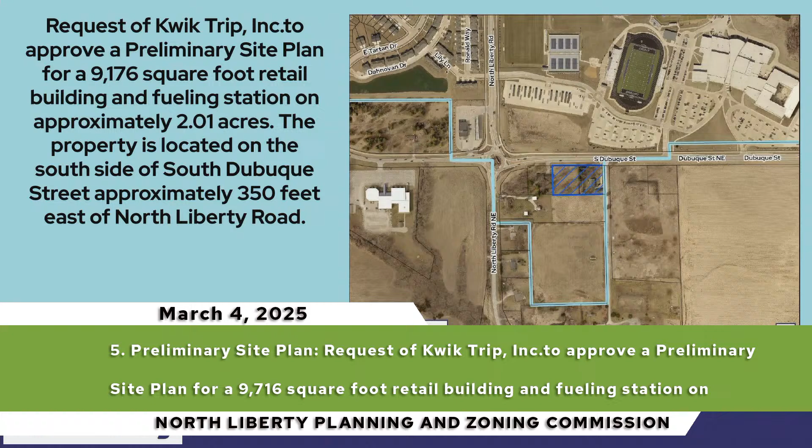Okay, so this is a request of Kwik Trip Inc. to approve a preliminary site plan for just over a 9,000 square foot retail building and fueling station, just over 2 acres. It's on South Dubuque Street, just east of North Liberty Road, across from the high school. You've been seeing lots of activity over in that area related to the construction of the subdivision improvements. You can see the area in blue up there. And the light blue line is actually the corporate limits of North Liberty. So it's pretty close to the southern limit of the corporate boundary.

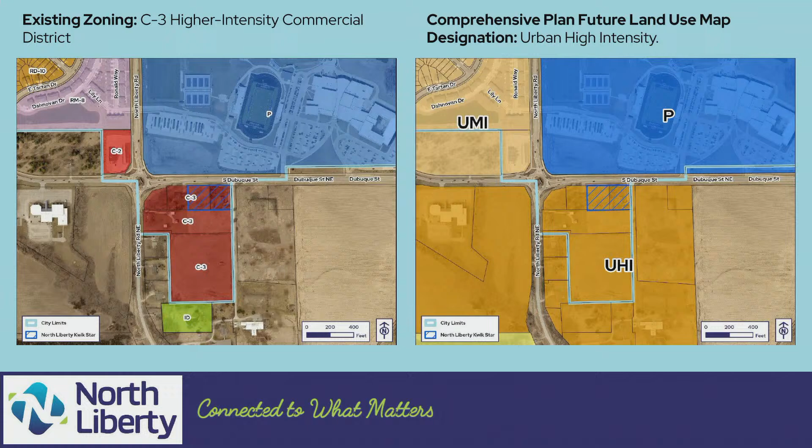Property is zoned C3, which is higher intensity commercial. Future land use map designation is urban high intensity, so the zoning is consistent with the future land use map designation. Pretty straightforward request. We did work closely with Kwik Trip folks. We had some concerns with the original layout, so they've been great to work through. There's a private road on the left, which would be the west side, so they've got access over in that location. The street to the east or on the right-hand side is a public street that will be constructed in conjunction with the subdivision. But just had some concerns with them, so they responded to those and revised their site plan accordingly. So we appreciate them working with us.

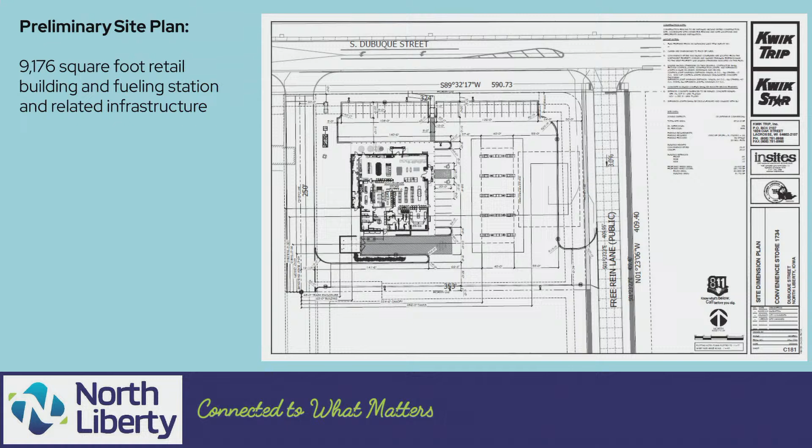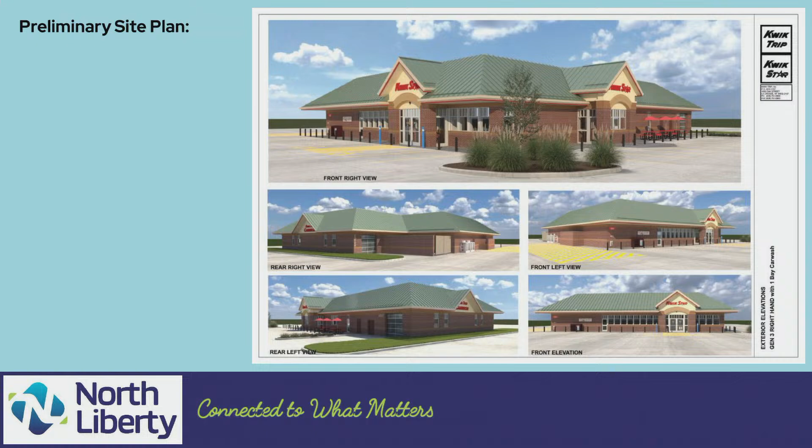Do we have an applicant presentation? Hi, my name is Casey Bonger. I'm a real estate manager for Kwik Trip and Kwik Star. Thank you for reviewing our site plan tonight, and just want to say thank you to Ryan. Great to work with. As he had mentioned, we worked through a few iterations of the site plan and I think came to one that works well for both parties. So he went over kind of everything related to that site.

It is our Generation 3 building, which is similar to the existing location in North Liberty. And we did have to take off the car wash here just due to grades on the southwest corner of the property. So otherwise, I don't think I have anything further unless you have any questions. Okay, do we have any public comment? Great. Move on to any questions or comments.

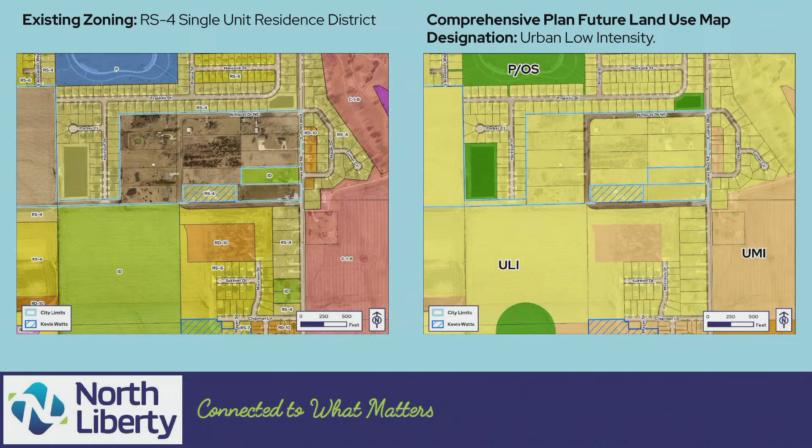There's actually a small 50-foot strip of land that the applicant owns that needs to maintain connection to the county properties. But with Remley Street being constructed with the adjacent development to the south, the applicant's taking the opportunity to subdivide the lots, having frontage on that street. So property is zoned RS4. That was rezoned a couple years ago. Future land use map designation is urban low intensity, so zoning is consistent with the land use. And here's the subdivision plat. The existing improvements would be on the larger lot, which would be lot 1. And then you see the 2 smaller lots toward the east.

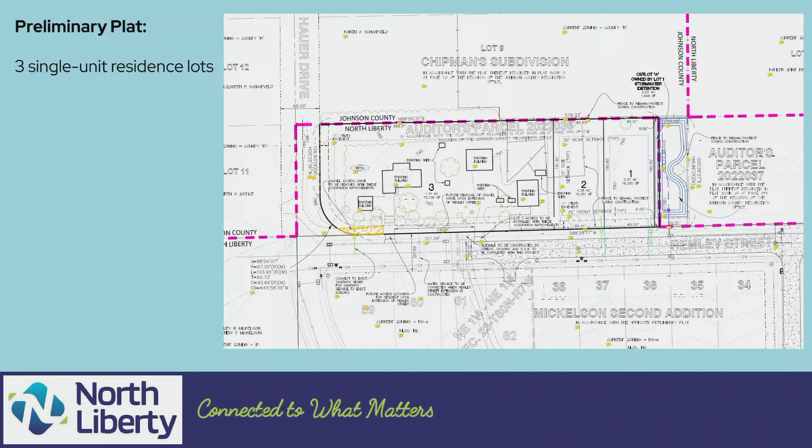Pretty straightforward request. We have 2 findings: that the subdivision would achieve consistency with the future land use map, and the subdivision plat would achieve consistency with subdivision ordinance standards. Staff recommends you accept those 2 listed findings and forward the request to the city council with a recommendation for approval. Thanks. Okay, do we have an applicant presentation? Good evening, John Marner with MMS Consultants representing the applicant. Nothing really to add, just as Russ pointed out, effort by the owner to take advantage and coordinate this subdivision with the ongoing construction for the subdivision immediately to the south. And I am available for any questions.

Thank you. Any public comments? Great, any questions or comments? No, I don't have any. Yeah, straightforward one. Okay. Do we have a motion? I move that the Planning Commission accept the 2 listed findings and forward the preliminary subdivision plat to the City Council with a recommendation for approval. And a second? I'll second. Can we have a roll call vote, please? Ward, aye. Willer, aye. Yadi, aye. Janizer, aye. Ahern, aye.

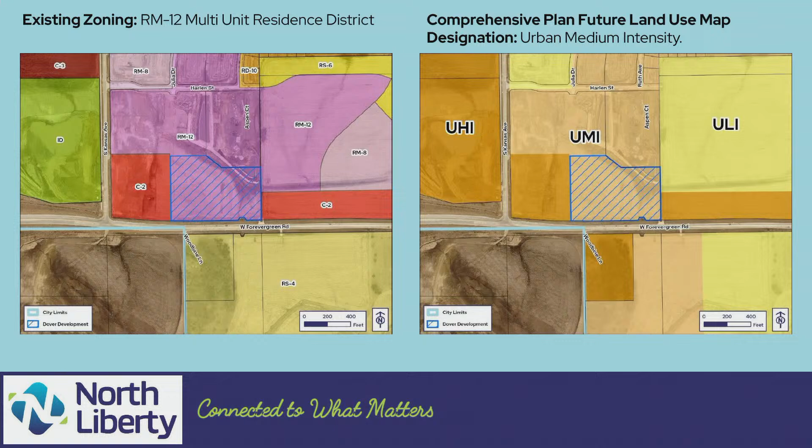So we agreed that this could be limited access to a right in, right out. It would be designed like a full access. We would just have the developer build a median in Forevergreen Road that essentially prohibits the left in and left out. So you can kind of see that road going north-south on the west, or the left side of their development. You could see it's a pretty large building. It's 133 units. That equates to just under 15 units to the acre.

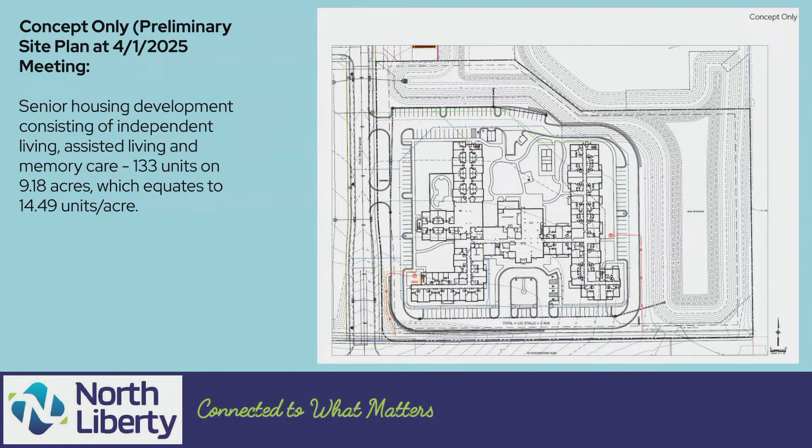One of the concerns I had, Forever Green's obviously a gateway in our community. And so I was a little bit concerned about the scale of the building to make sure it reflected what our built environment is. Again, they were really great to work with. They were responsive to some of the concerns I had. Again, you'll see these in a month, but higher levels of masonry on the east, south, and west. In the RM12, in the RM21, it's only 25% on elevations facing a street, which would be the south and west. They're much higher than that. They're closer to like 50, 60% on those elevations.

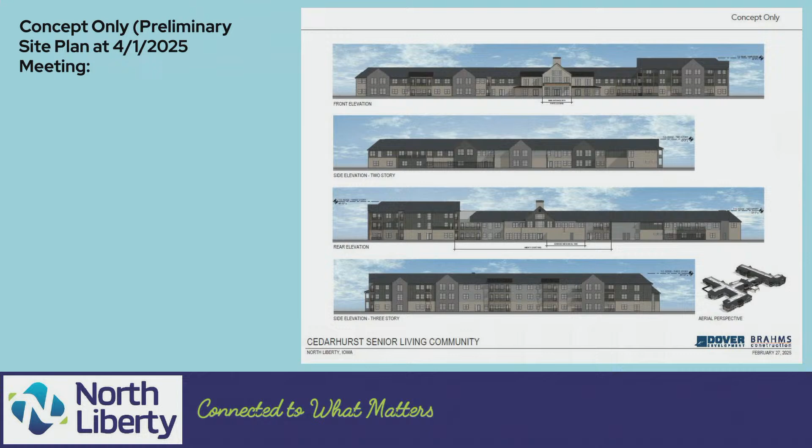And I think, can I advocate for masonry on a house? It looks nice, but it's not that big of a deal because the scale of the building's not that big. When you get into these larger buildings, it really starts to become important because they make a big dramatic impact on our community. So also the use, this isn't a high traffic use. There's definitely a need for it in our community. So it's a good location where you're not going to have tons of cars trying to get in and out of this location. So we do think the urban high intensity is appropriate in this location. We also think that the RM21 zoning also would be appropriate. It's a good location for it.

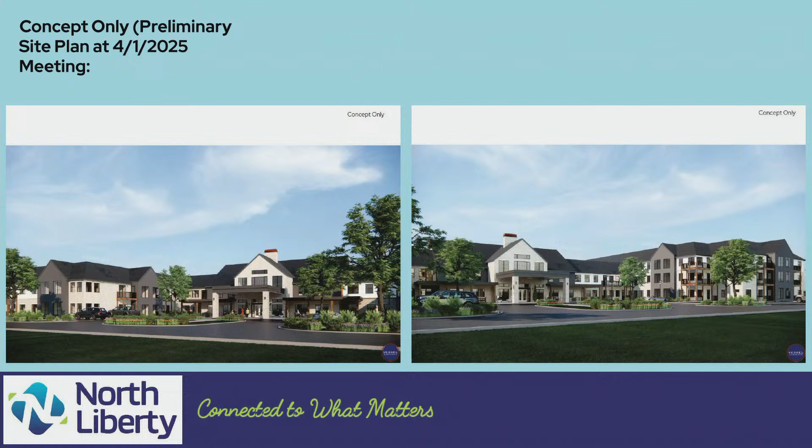Here's some renderings of what it would look like. So it's a very nice looking building. I think it's going to fit great along that corridor. And again, there's just a big need, and I know the folks over at Dover are going to talk about that in a second. So we did have two findings. The one was related to the future land use map amendment, and then the second one being, there's a typo in there, my apologies, that the rezoning would be consistent with approval standards. And so staff recommends you accept those two findings and forward those two requests to the City Council with a recommendation for approval. Thank you.

Great. Do we have an applicant presentation?

Hi, I'm Nick Dwyer with Dover Development, the applicant. Thanks, Ryan, for the presentation. Ryan's been really good to work with.

Just wanted to give you guys a little bit of background on us. So we're based in St. Louis, Missouri. This will be our first project in Iowa. We are a developer, owner, operator of senior housing communities across the Midwest. So we're really excited to kick things off here in our Iowa expansion in North Liberty. We know there's definitely some compelling demographics, just the growth here, especially in the senior population. And I think this will be sort of the first of its kind to serve the seniors here in North Liberty and the surrounding areas.

So you can kind of see that rendering that Ryan had earlier was a building that we're getting ready to open in a suburb of St. Louis that's very similar to North Liberty, Wentzville, Missouri. And the project will open next month, and it's pre-leasing very well, and it's been very well received. So we're hoping to do the same thing here.